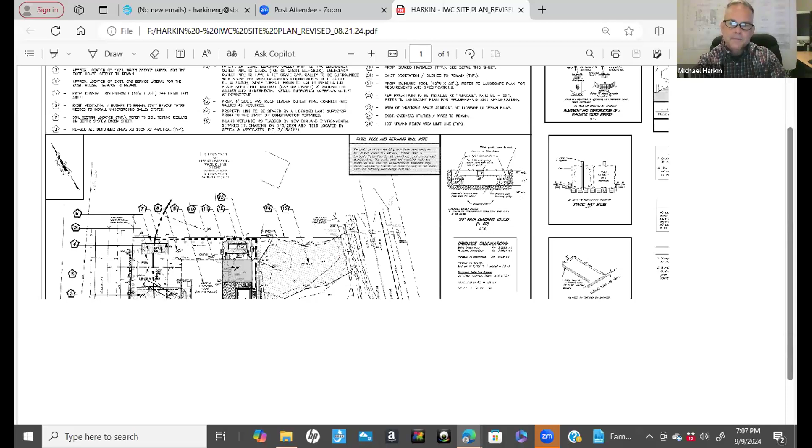Are you guys seeing the map on your screen? No. How about now? Yes. Okay, so let me zoom in a little bit. Again, so we're at 21 Liberty Street. Just being a little ornery here. You're gonna make me take over driving. Yeah, exactly. All right, now we're all good. A little slow in the country.

So again, we're at 21 Liberty Street. The parcel is comprised of about half an acre, 0.48 acres to be exact. The survey was performed by Gesick and Associates. There is an area of inland wetlands, you can see where my cursor is, flagged by Mr. Richard Snarsky. That area is about 3,770 square feet, about 0.1 acres, so a small area of the property is inland wetlands. We have Connecticut Route 1 where my cursor is, and Liberty Street on the west side. There's an existing driveway where my cursor is, and the septic system is up in front. Here is the existing garage and the 2-bedroom house as you see it. There's a row of arborvitaes for those of you that were on the site walk, right there.

And you can see the wetlands come up to almost the back, if not the back, of those arborvitaes. A couple of years ago, there was an application in front of this Wetlands Commission for a remediation to remove invasive species. That was approved and the invasive species removal was done.

So the project this time is to build a habitable space addition off the rear of the house. And in order to accompany that, we'll be increasing the impervious area, so we need to take care of that with two 24-inch concrete galleys on the side of the property line. The roof leaders will be pumped into those galleys for groundwater recharge and to offset the amount of impervious we're adding.

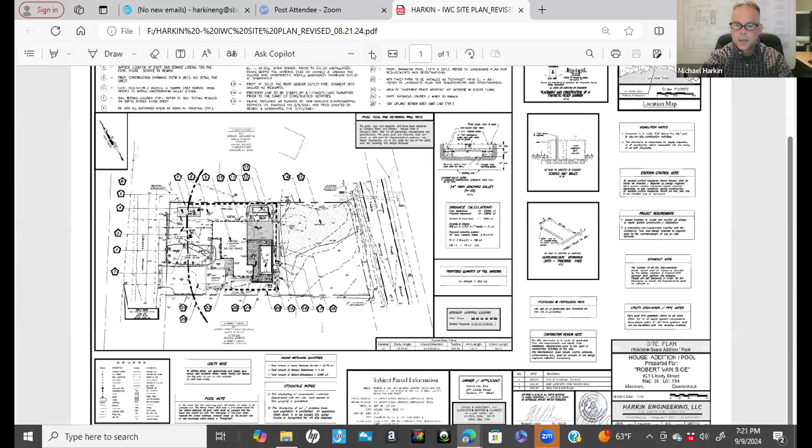Give me one second. This detail right here. Give me a sec. Trying to scroll over for you. Not letting me. This detail right here, it's a 24-inch galley, and they have a cap that comes up to grade. So if you get a torrential downpour and the roof leaders fill up this galley void so quickly that it can't infiltrate that water fast enough, it comes up the cap and spills out to grade.

Okay, yep, they're common. We've been using them for 20, 25 years.

Now, is there a residence to the north? Yes, there's a residence here. It literally could flow to the neighbor's yard? Nope, the way it's designed with the spot shot elevations, if it overflows, it flows into the wetlands.

As you know, Joe, we can't put any more water onto somebody else's property than is currently going there, so hence we have an underground system and we have it graded so it spills over. Most of the time it'll get infiltrated, but on those hard rains we sometimes see during a big storm event, it may fill up and not be able to percolate that quickly.

I have a question about this arborvitae that are functioning essentially as a border, a screen, a physical barrier between the backyard and the 7 feet to the wetland. So during construction, is it anticipated you're building pretty close to that? And is there any sense that you might damage root systems or otherwise damage that kind of living fence?

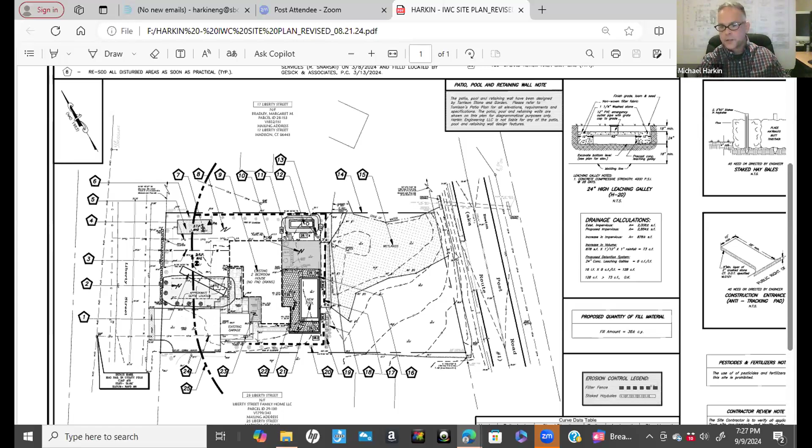Okay, yeah, now that's what we were saying, Anna. I don't think it's been officially delineated in a while. It was walked by Rich Snarsky in 2020 because they wanted to remove these invasives. I don't think there was a site walk at the time because that was like the height of COVID. And so I only looked at this site from the street because I was out of town. So I don't know, but Martin, were you gonna say something? Because it sounds like you actually walked it more. Or Joe, someone was gonna say something.

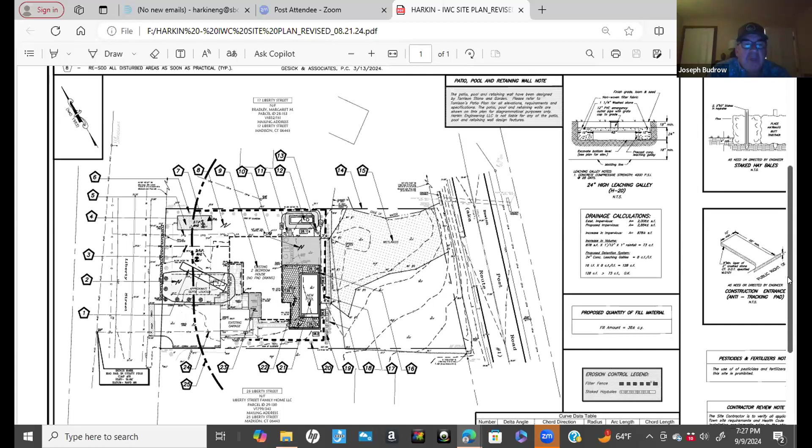I was simply going to ask Mike if the pool is proposed as a saltwater pool or a chlorine pool. I know the last few summers we've had a pool and we've had to pump it out due to overflow at least three times a summer. Where are they going to pump the pool out? I'm going to guess into the wetlands.

No—my office does about 400 pools a year throughout the state, and we always put this little note on here with all the approvals: in the event the swimming pool will require its water to be pumped out, the homeowner shall have a pool water truck for the water disposal. Basically, they pump the pool out into a truck and take it off site.

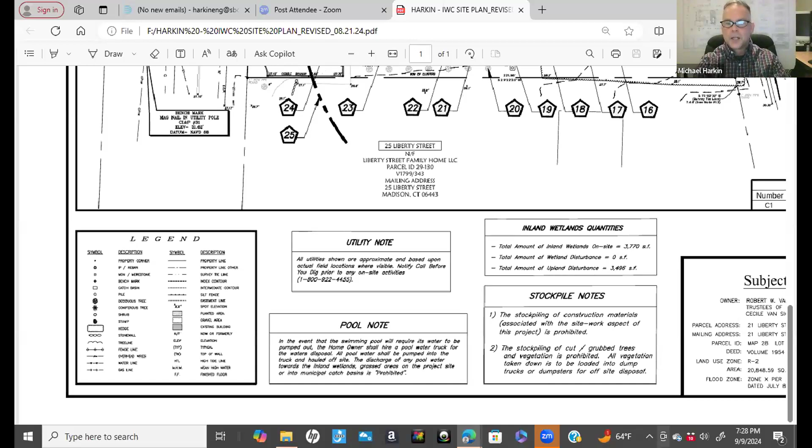People say, 'how do you make sure they do that?' Believe me, with the pool companies that take care of gunite pools, they do that—they're not dumping it into the wetlands, nor are they putting it into catch basins, which happens a lot with vinyl pools, but not with the people that take care of gunite pools. If you tell them specifically to take care of it that way, they do it because it's very costly to the homeowner—they get the charge.

Okay, that's a good note to have. Yeah, and we do so many of these, and that question is asked so frequently in almost every project in front of the wetlands and DEP. We do a lot of pools against Long Island Sound, and they require that note on our plans.

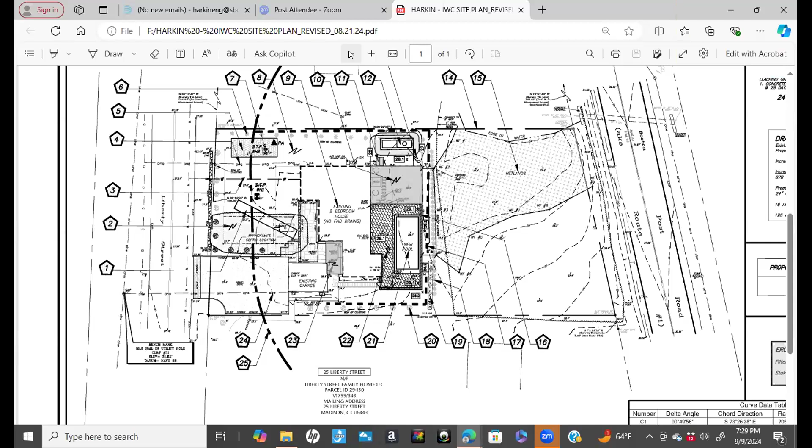So Mike, I have a question. So the pool that's being semi-submerged, and you were saying there's not a lot of fill—what's coming out for the addition will replace it to raise up the area for the semi-submerged pool?

Yes, okay. So where my cursor is, this patio area has to be brought up about 2.5 feet, and that'll come from this area in here. And the about 2 feet that they have to draw down for the pool will all go into this area.

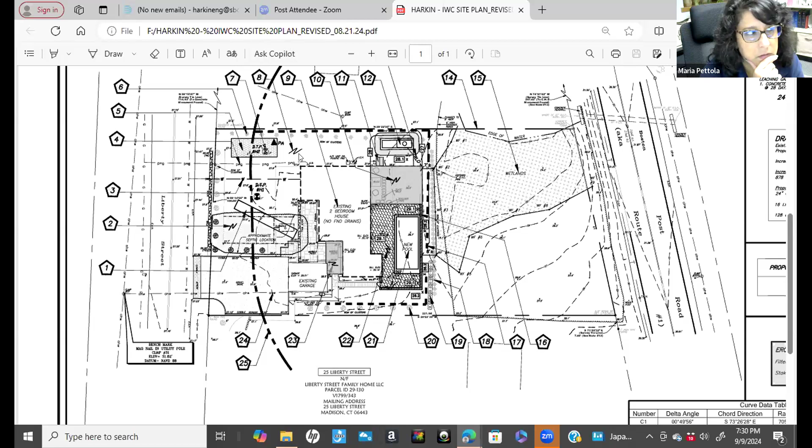It's almost like they have to work themselves out from a construction standpoint. They have to come in, put this wall in, start excavating for the pool to put the fill here, excavate for the addition, put the fill in here, and then pour the addition and swimming pool—pool then addition—and work themselves out.

It's gonna be carefully orchestrated. It is going to be a work of art.

Because if you guys saw the property with the immaculate landscaping there, they don't want that disturbed. So there's going to be a lot of very precise networking between the contractors that are building out there. A lot of this stuff has to be brought in by hand. You're not gonna get machines back there.

Well, that was my next question - what type is it, large scale, small scale? You're gonna find like a Bobcat back there bringing pallets, it's gonna take a ton of time. You're not gonna see a big excavator back there trying to dig, and a mini excavator spending the time to dig out that foundation hole.

So thinking about the living fence we have, it might be helpful - what we do when people are so close to wetlands, we often ask to have a fence or wooden posts or something to identify that there's a wetland boundary. I understand they have this living boundary, but maybe on the other side where they're not going to see it, it would be helpful to explicitly say this is a wetland, because this development is coming up so close to it, and hopefully none of those trees will die. But even with that, I still think it's helpful to have some of these posts every 20-30 feet delineating the wetland.

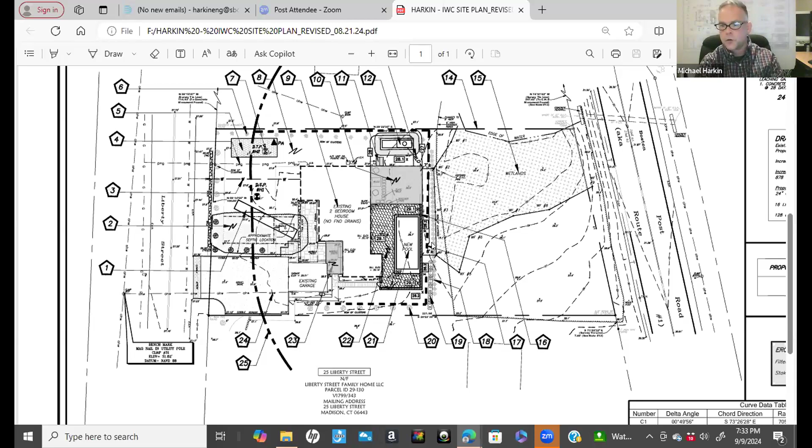The next owner? Yeah, I get it, the house can get sold, exactly. So yeah, I believe that's something that my clients wouldn't have a problem with if you wanted to make that part of the condition of approval - that wetlands placards be put up every 25 feet or so across the back edge of the arborvitaes.

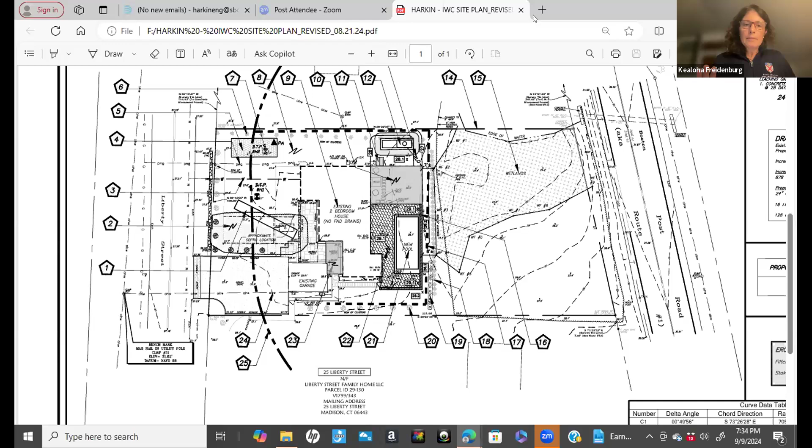Okay, so we can definitely act on this tonight if there aren't any other questions. Maria has very kindly drafted a staff memo for us that highlights - well, here, I will share my screen if I can do that. I could do it if you - oh, I have it. Okay, so people can see this.

All right, so we have just kind of setting out what the project is. So this is draft, because I will be proposing a condition, an additional condition at least. So our current standard language is about the agent's agent and keeping everything stabilized.

I guess the other thing I'll put out to the agency is that in some of our more recent applications, like Race Hill and some others, we've been asking people to go out and check those erosion and sedimentation control measures after significant 1 inch plus storms. And I know we also had - what was our most recent one, there was another one - oh I know, it was Stony Lane, Stone Road, the one off Neck Road, where some of the fencing had kind of collapsed. So I guess I would suggest that if there's a significant storm, we just make sure people are checking those E&S measures.

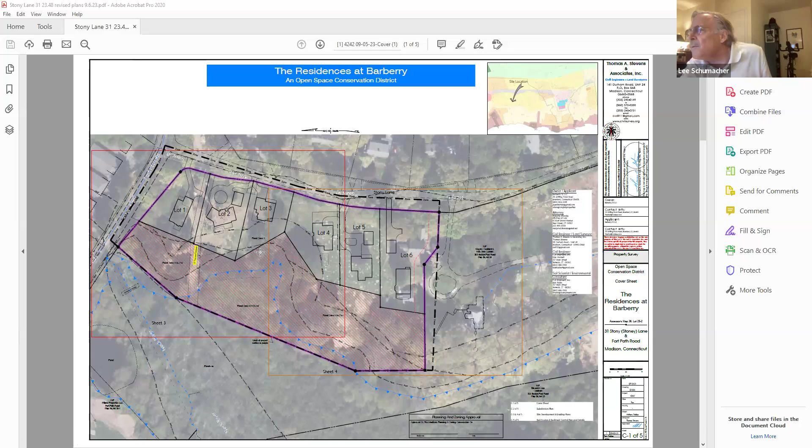We can, so you can have it for reference. Yeah, I think that'd be helpful. And which lot, those don't have - this is, you're going to 3 and 4 have submitted. Oh, lot 3 and 4, okay.

However, you'll note there's going to be some changes, and they're going back to planning and zoning prior to the October meeting, because they've changed some of the driveways. They've resituated some of the houses, and changed what was shared, so now they're all having separate driveways.

I know, but this one definitely - the lot delineation is all gonna stay the same. The lot delineation is going to stay, yes, just the house location and driveways may not. Got it, okay, thanks. That would be helpful to me if you could add it to the files.

Okay, and I guess we'll just have to be aware that what we receive tonight is undoubtedly going to change. Okay, no site visit, that's fine. Okay, yeah, so that looks pretty straightforward. Okay, so those are received.

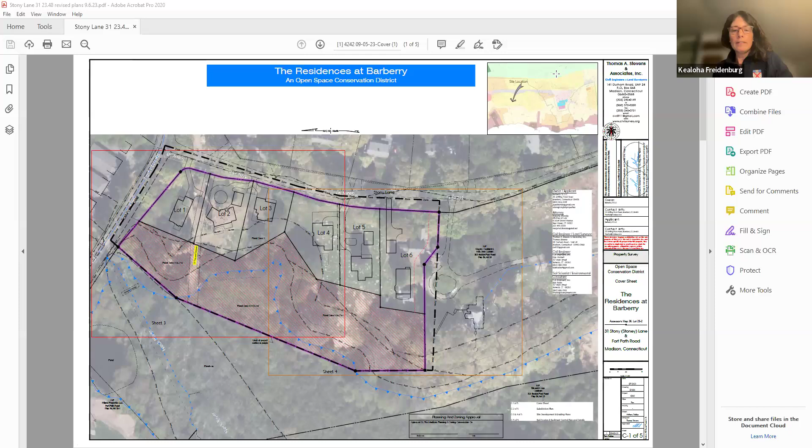Peter Marlowe. I can ask - I can't tell a phone number. But in any event, I did send the file of what we did receive. They harvested about 20 years ago, and it's time to do it again.

They will do selective foresting, and this is also one of those properties where it borders on Guilford, so there's also a pending application in Guilford. Guilford had a wetland crossing, as far as I know, so their application is a little more extensive.

Let me see if this is Peter - I'm not sure if this is you. If it is, can you unmute? Or I could just keep talking.

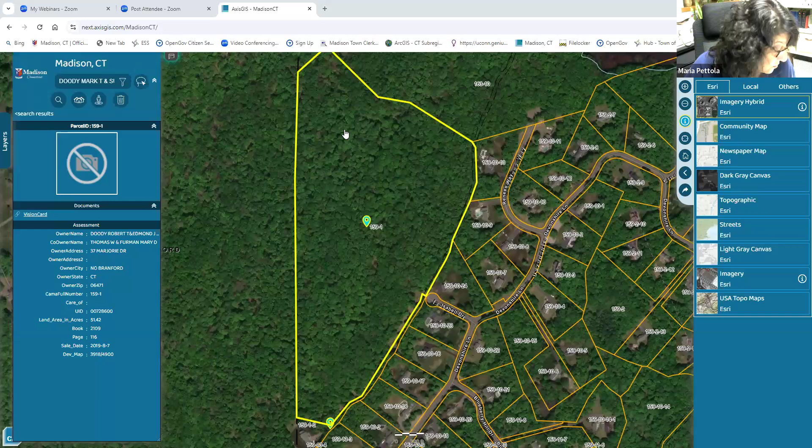He's called out selective harvesting of 14-inch at chest height trees, but not much more than that outside of what he submitted. And to get up there, you have to go up 79 and then Dorset Lane. It's up in there, off of Devonshire.

And luckily, there's a cul-de-sac at the end here, so they're going to be coming in and out to do the Madison side. And I think it said they're staying 50 feet away from the wetland - at the closest there'll be 50 feet off the wetland.

Just take this over here, make this smaller. And this isn't one of these as of right. Yep, this is the one he submitted, but it was so dark, really hard to see. So I ended up giving him - I found a survey today, and he added that, and those will be the little skid roads.

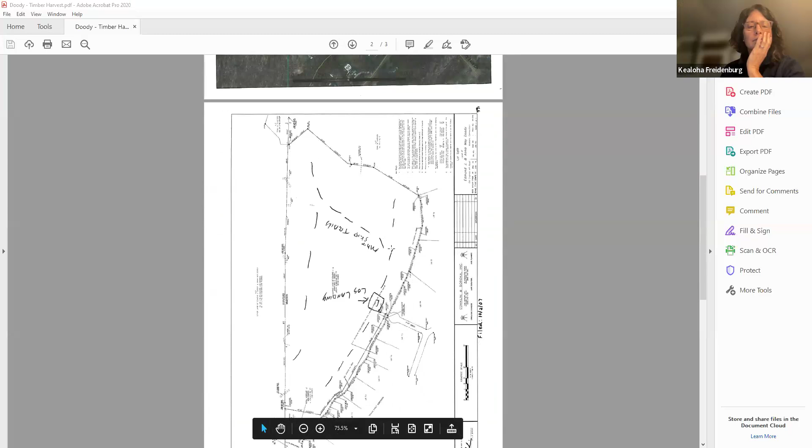Okay, that's what those are. Is it purple? This is the pocket of wetland soil. Okay, and so they're on the edge.

My only concern, not that the activity is concerning, is that we're amending the agenda to put it on today. I think we should at least keep it on until next month. It came in Friday. We did not amend the actual online agenda, so it was received on Friday. So they have a right to be received.

Oh yeah, receiving is okay. I don't think we should feel pressured to vote on it tonight. You don't have to if you don't want to. It's just a matter of making them wait a month.

Yeah, well it is, because they're being heard in Guilford on Wednesday. And that is more significant because they have a wetland crossing in Guilford. So I think we should at least sit on it and look at it until the next meeting.

Well, it would have been helpful, there wasn't a whole lot of information. It would have been helpful to hear from them. Yeah, I'm not sure if this is that.

Oh wait, hold on, here he is. This is him. He's on by phone, he's not—